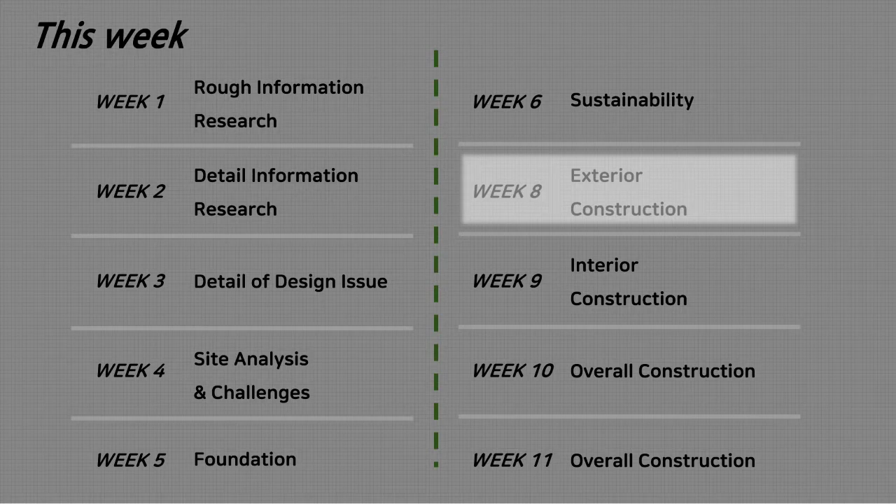Let's begin. This week we present you the exterior construction of the Aquatic Center. These are the contents, starting with the review. The exterior structure and calculation will follow next. Let's start it with the review.

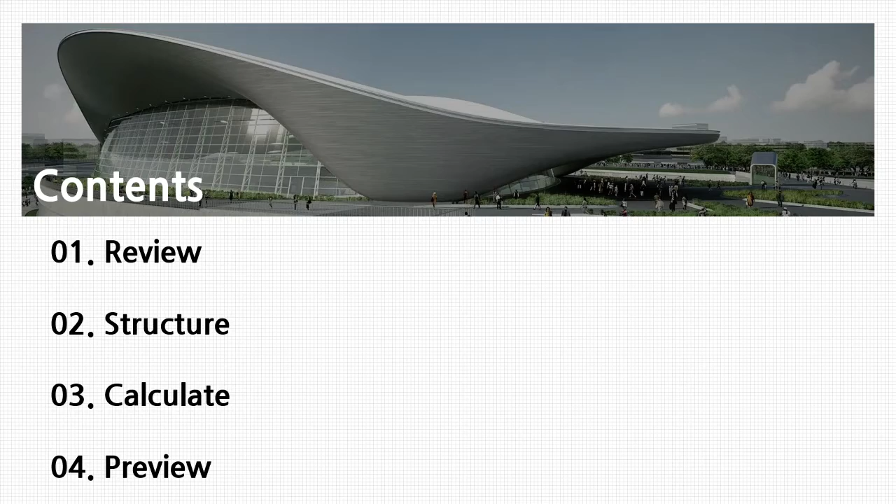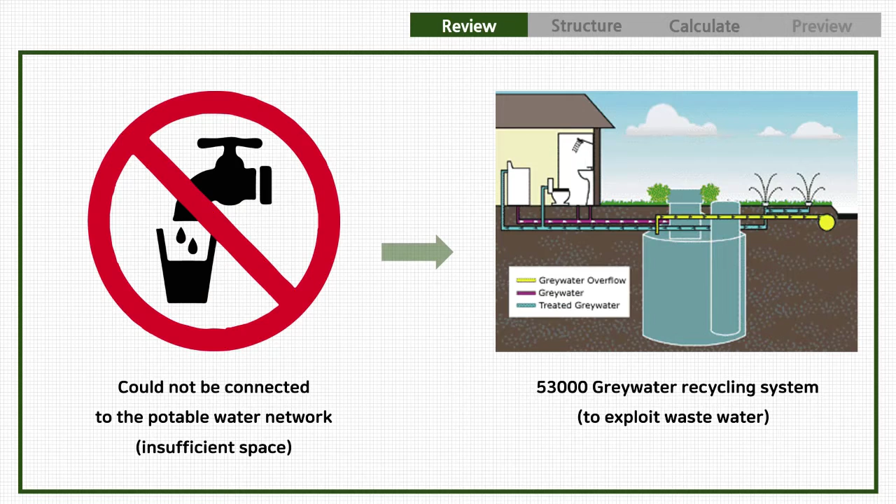The Aquatic Center could not be connected to the site-wide non-potable water network due to insufficient space in the service corridor connecting the venue to the main site. Alternatively, it employs a 53,000 greywater recycling system to exploit the vast quantities of wastewater. Approximately one-third of this processed water, 67.5 megaliters, is treated to a non-potable standard to meet toilet and urinal flushing demand, substituting mains water use.

The Aquatics Center also employs an innovative solution to reduce energy consumption during games time operation. Detailed thermal modeling and elemental redesign of the 15,000 seat temporary structures enable mechanical cooling to be entirely eliminated. The resulting carbon saving during games time operation is approximately 56 tons and the resultant cost saving over 250,000 pounds.

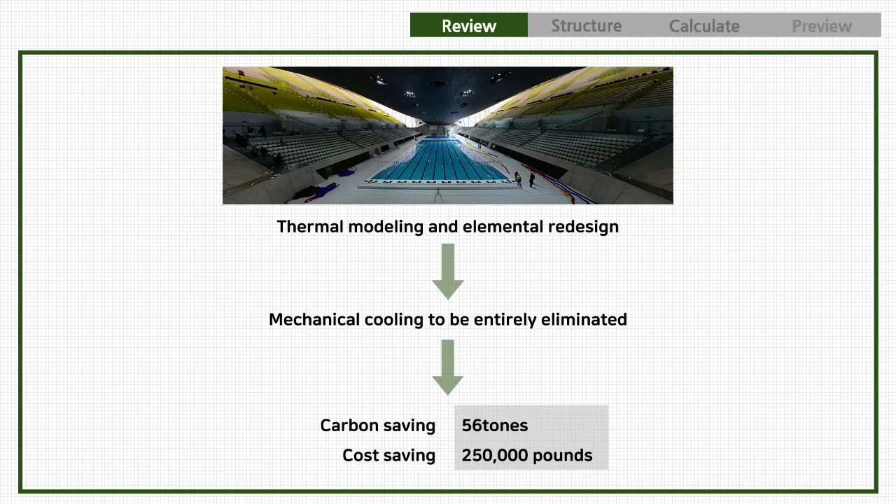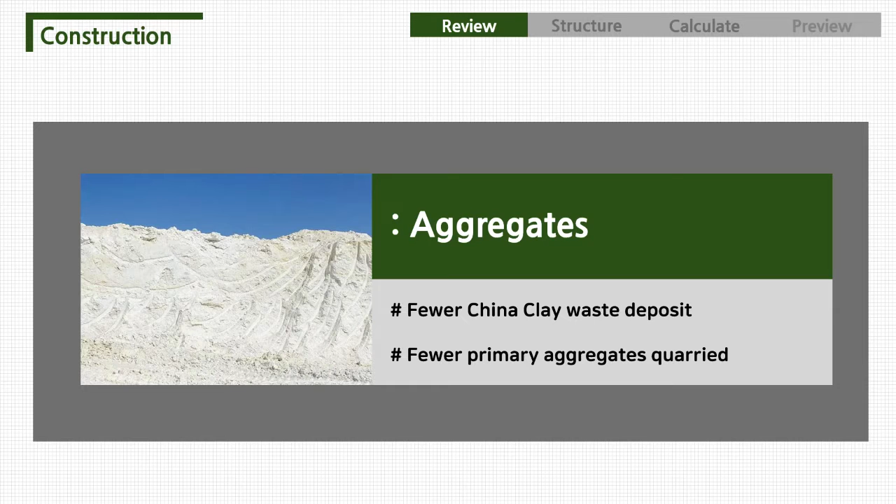This stent solution meant that fewer tons of china clay waste were deposited, and fewer tons of primary aggregates were quarried. Starting with stent solution, construction team tried to use secondary materials for the construction. Next, we present about GGBS cement. It is strong, high durability, and good appearance. This furnace slag is highly cementitious and high in calcium silicate hydrate, which is a strength-enhancing compound, increasing the strength, durability, and appearance of the concrete.

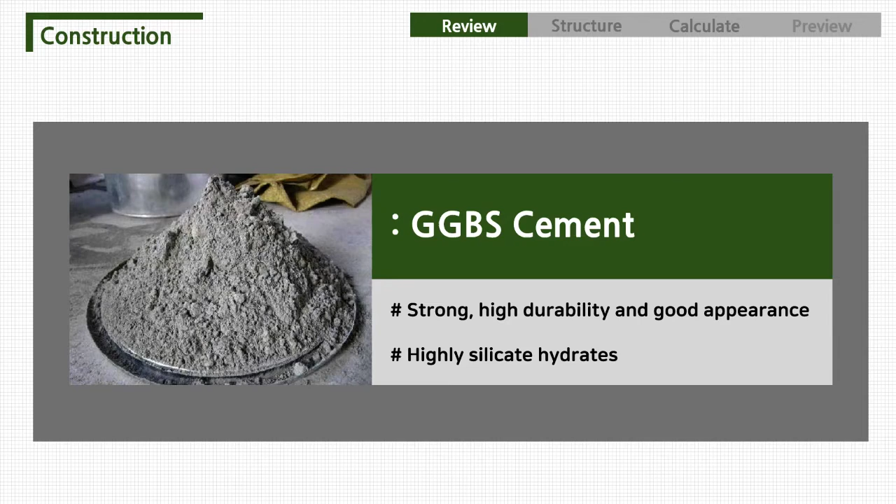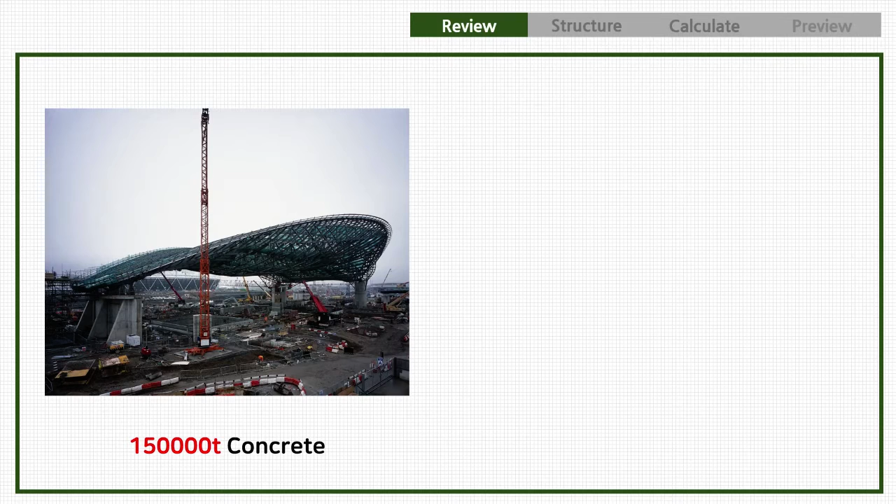Over 150,000 tons of concrete was used in the Aquatic Center. The sustainability of the center can be demonstrated by over 4,000 tons of embodied CO2 savings and substitution of over 29,000 tons of primary aggregate.

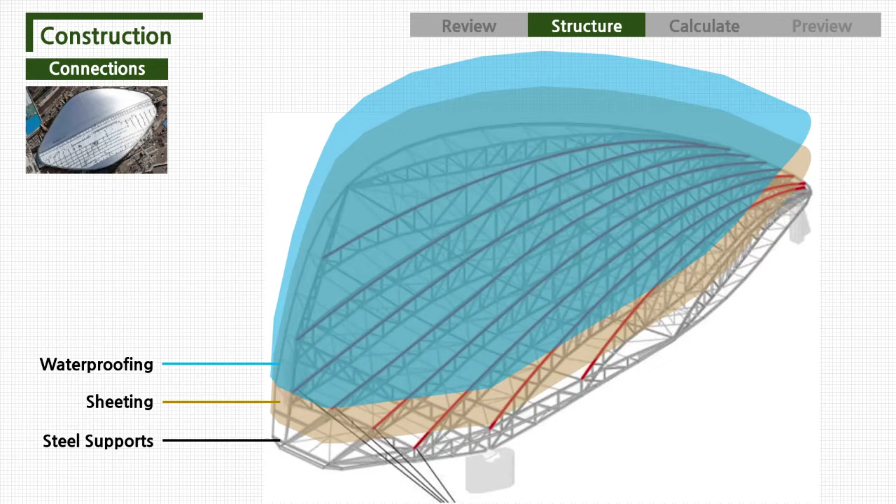Let's talk about roof structure. There are several layers created in the top of the roof. Sheeting and waterproofing were put down over the steel supports. Mechanical systems were placed into the space. Spaces were added before the final aluminum sheeting was added. The process of rolling out the sheeting for the roof only took a team of 25. It took only a month to cover the roof fully with the last aluminum finish.

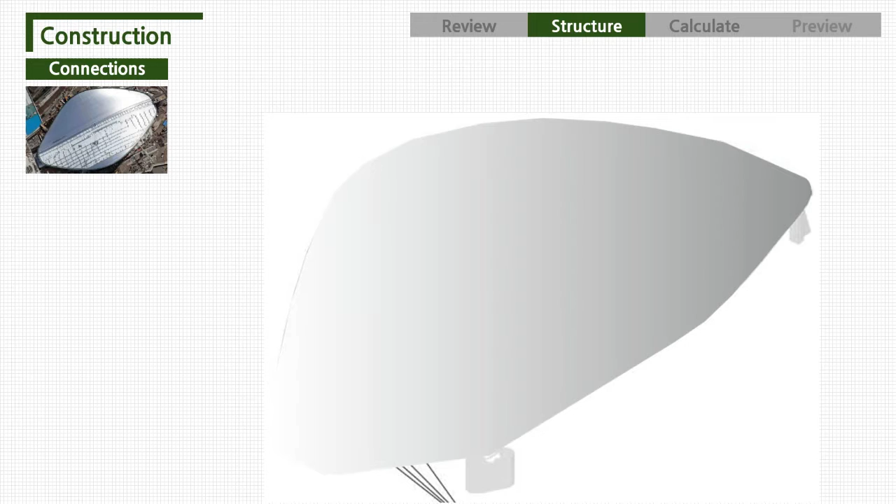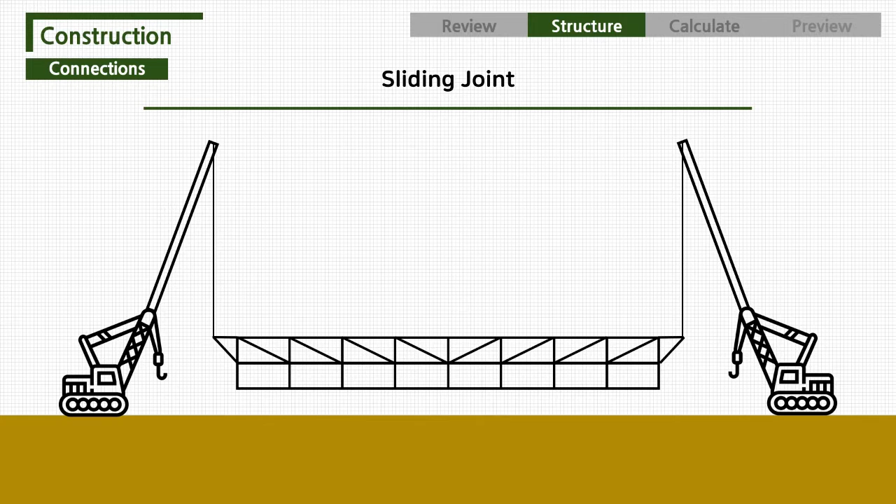The connection between the roof and the support columns was the sliding joint. Joints like these are commonly found in bridges. The joint can slide up to 2 feet. This is to allow for expansion and contraction that occurs in the steel roof structure due to temperature changes.

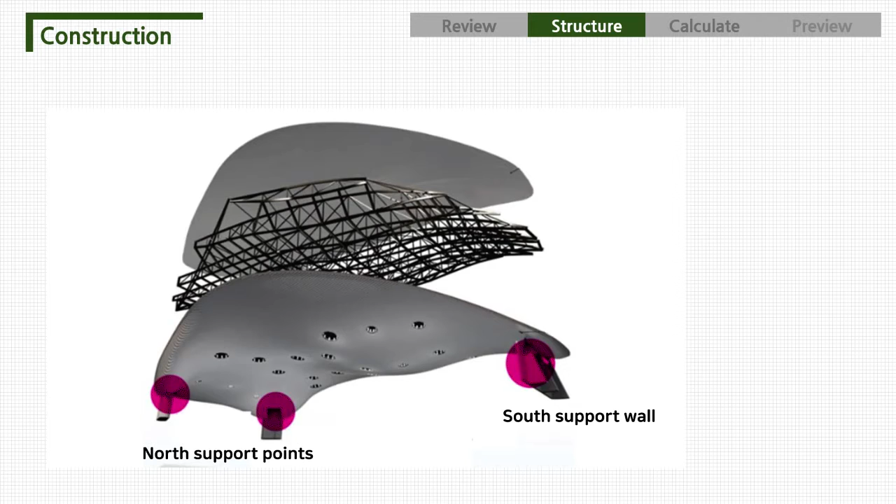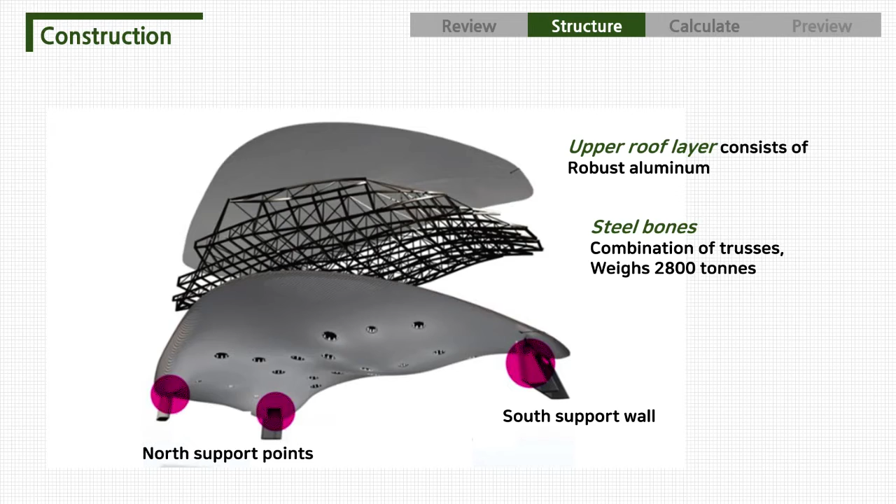As you can see in this picture, the roof structure is made of 3 parts and supports. First, the upper roof layer consists of robust aluminum, half of which is recycled. Next, the steel bones are a combination of shaped trusses to get a double curve, allowing a column-free clear view of the pools. It weighs 2,800 tons, and the hardwood ceiling is made up of 37,000 individual strips.

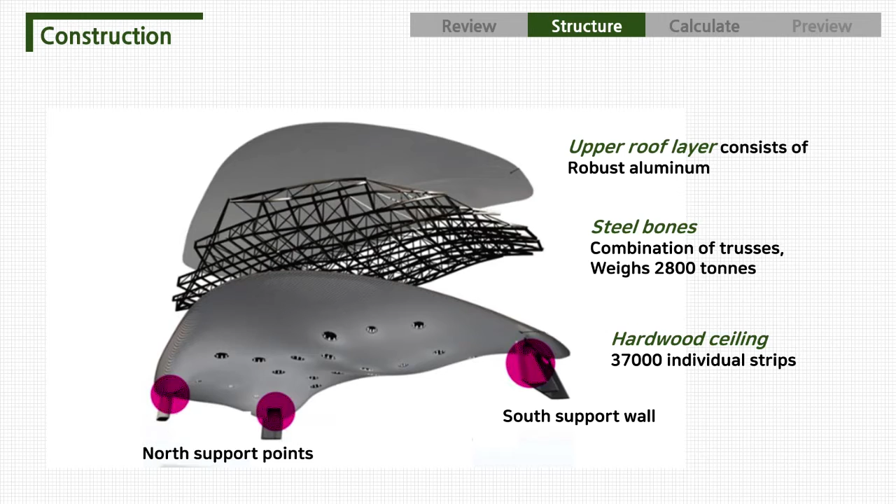The complete structure of 11,000 square meters is supported only in 3 points: a concrete wall at the south end and 2 concrete cores at the north side. Some of the steel trusses of the roof are 40 meters long and weigh 20 tons. Spanning from north to south, they cover the generously sized main area without any in-between supports.

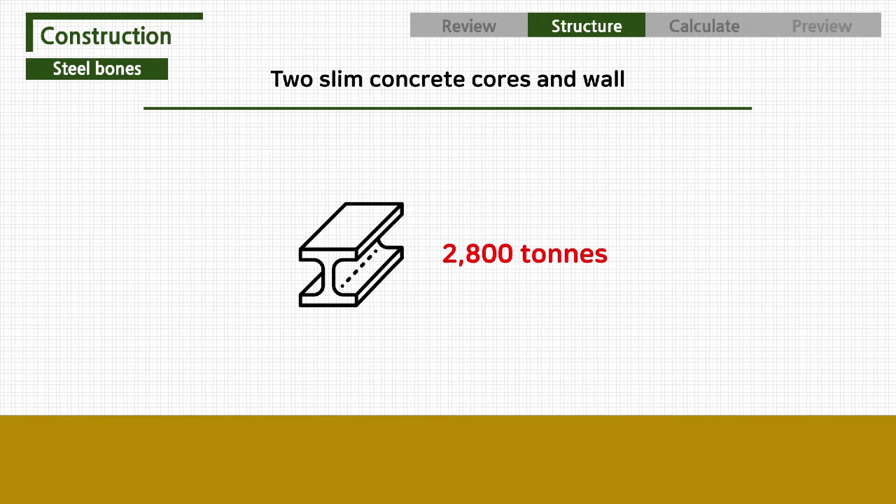Just 2 slim concrete supports and a concrete wall located opposite these at the southern end suffice to conduct the force of the hidden steel space framework construction into the ground. As much as 2,800 tons of steel were needed to give the 160-meter long and 80-meter wide roof its light and floating look.

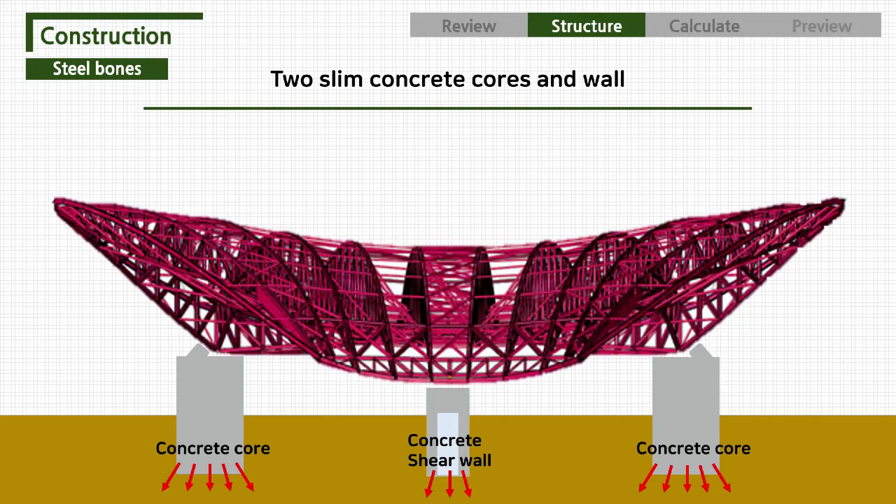This steel framework was initially constructed on temporary supports before the entire 3,000-ton structure was lifted up in a single movement and successfully placed back down onto its permanent concrete supports. The venue's roof proved to be one of the most complex engineering challenges of the Olympic Park's big structures.

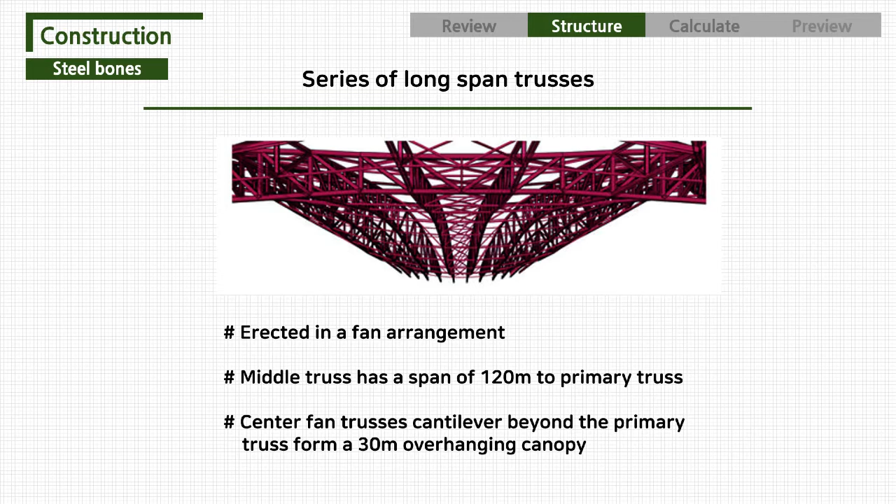A series of long-span trusses form the roof; they were erected in a fan arrangement to create the plan geometry of the structure. The middle truss has a span of approximately 120 meters to a primary truss, which in turn spans 54 meters in a transverse direction between two concrete cores. These center fan trusses cantilever beyond the primary truss to form a 30-meter overhanging canopy at the northern end. And this is the video that explains the roof construction process.

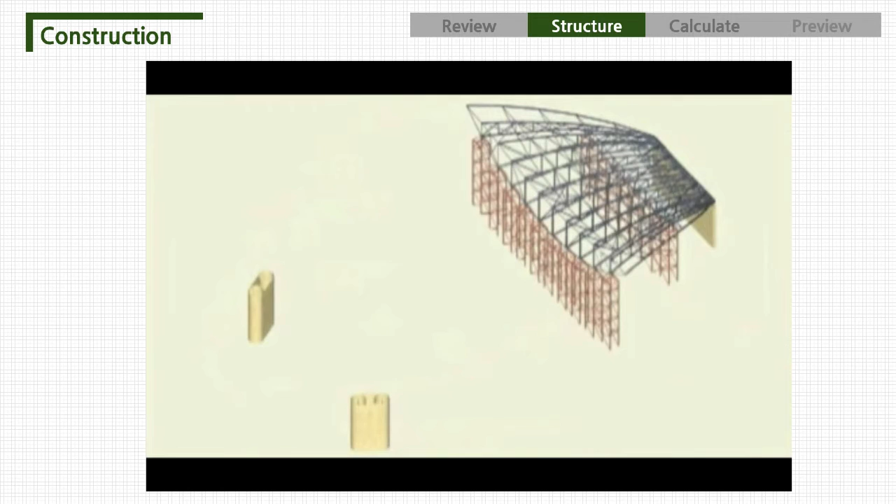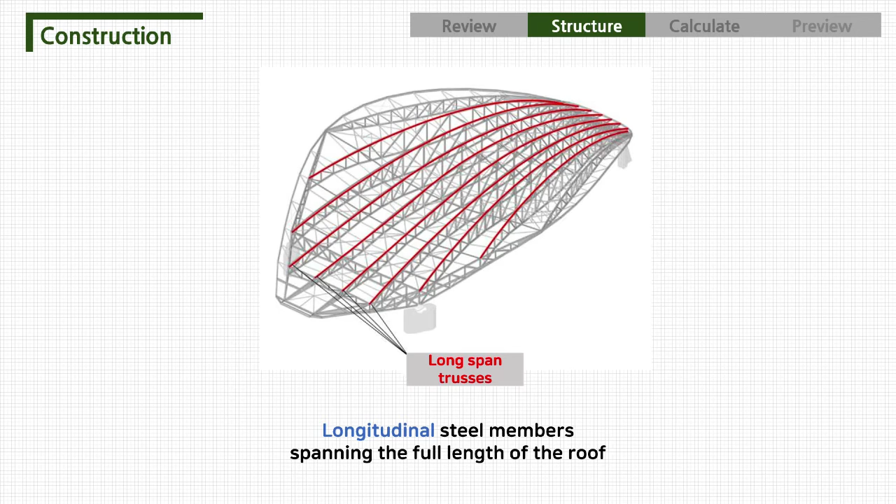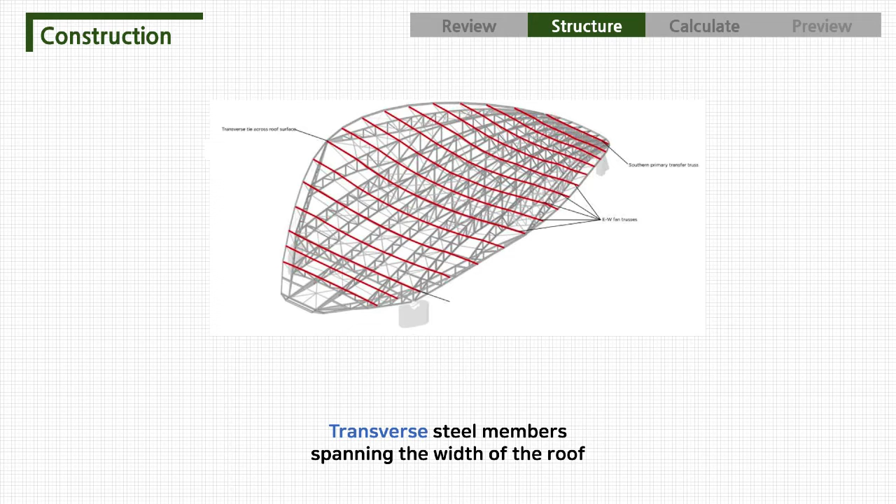From now on, let's analyze how the roof part is solid without collapsing. The roof structure comprises a series of long span trusses spanning the length of the main pool hall, from the transverse truss mounted on southern retaining wall bearings to another transverse truss spanning between the northern concrete cores. The main trusses lie in a fan arrangement to create the plan shape of the roof.

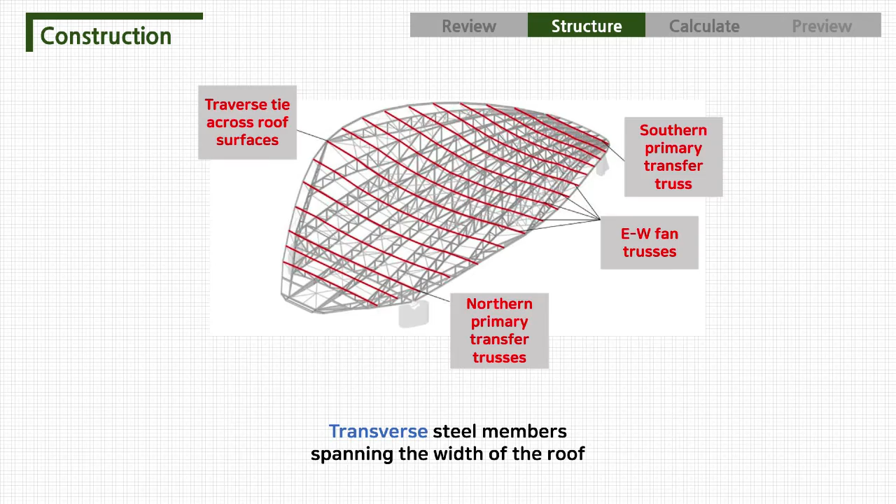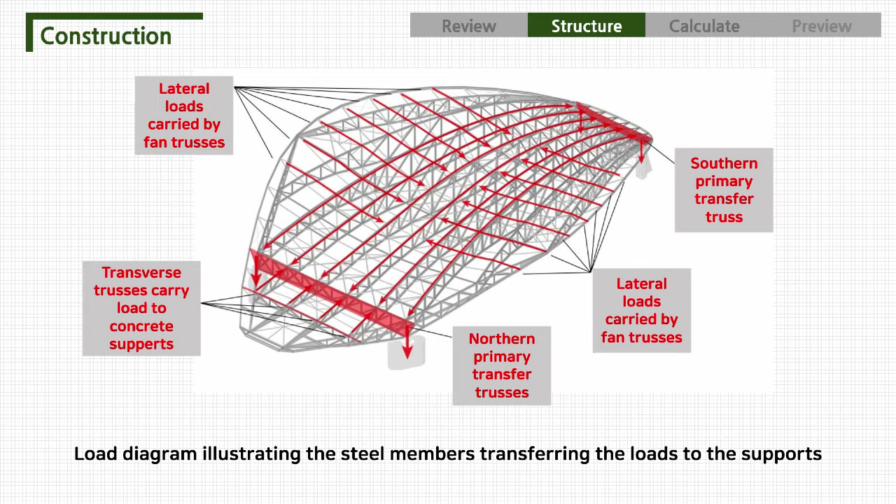The center fan trusses cantilever northwards beyond the north transverse truss 100 feet to form an overhanging canopy over the main public entrance plaza. The center fan trusses carry load in truss sections spanning between the north and south transverse trusses, which carry the load down to the supporting bearings on the concrete structure below.

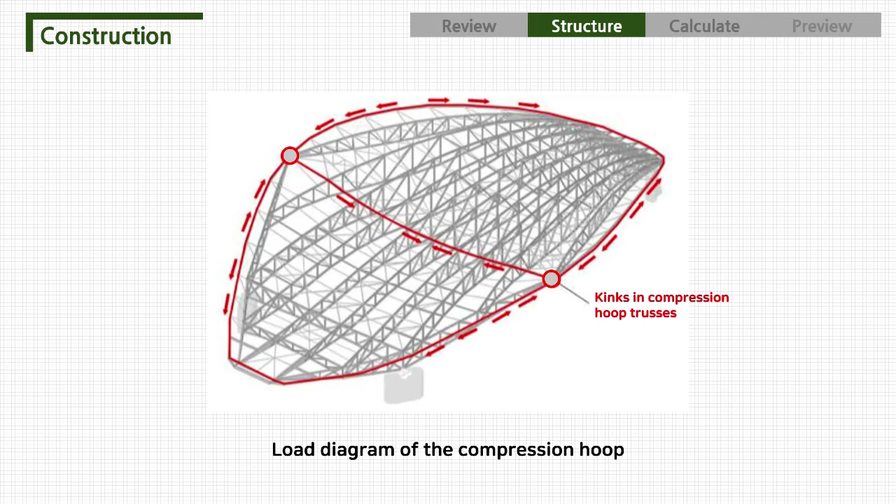Under uniform loading, the two opposite inclined arches in the wing areas balance each other, forming a compression hoop around the roof perimeter. A tension force arises from the change in geometry of the compression hoop in plan at the kinks, which occur at the wingtips, and this is resisted by a tension tie across the center, resulting in tension force in the central fan trusses.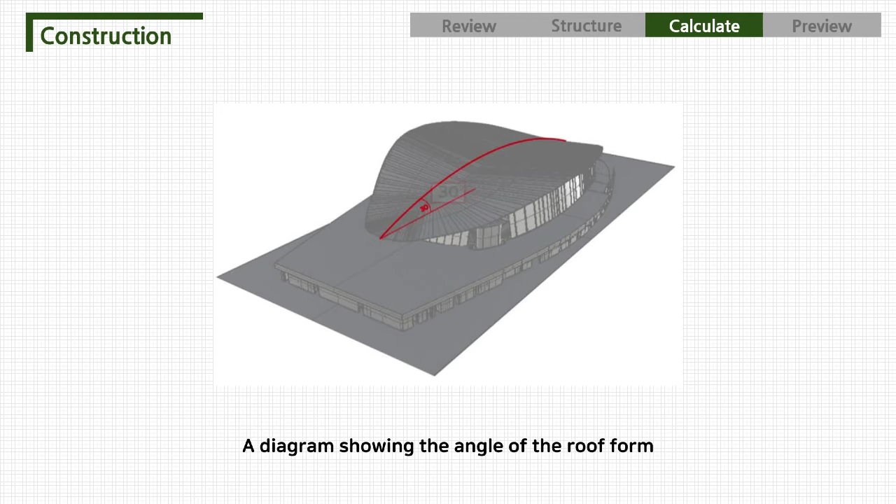The structure of the roof can be deduced to a dome form. In a dome structure, the angle of 34 degrees to the normal separates compression and tensile forces. In the London Aquatic Centre, the angle of the roof is 30 degrees. Therefore, it creates a compression hoop instead of a tension ring, since a tension ring would occur if the angle was greater than 34 degrees.

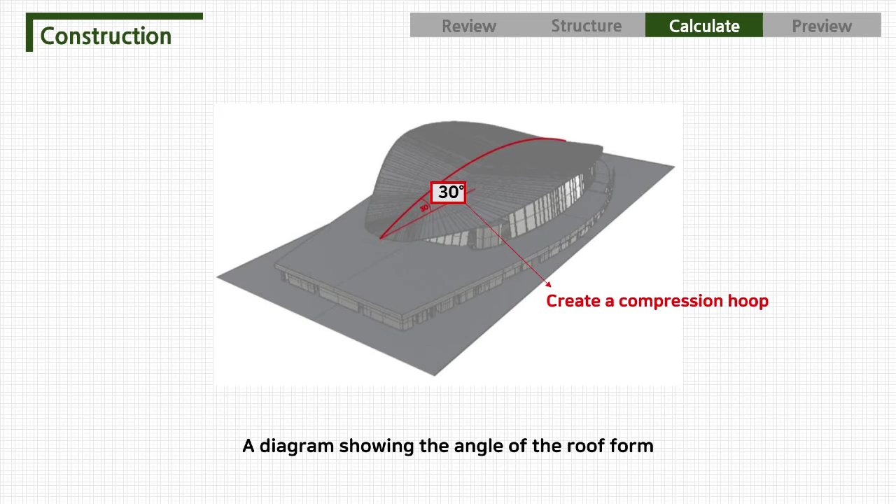The attraction of this building is the roof, and it has an unusual shape on the outside.

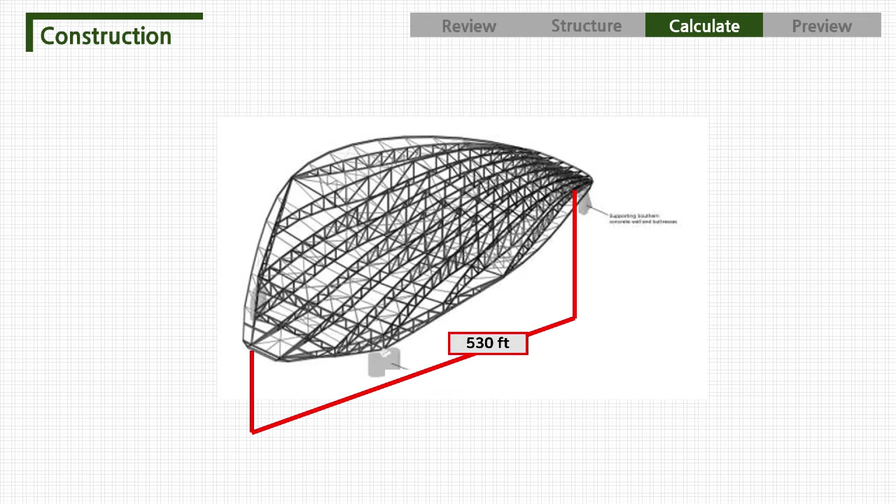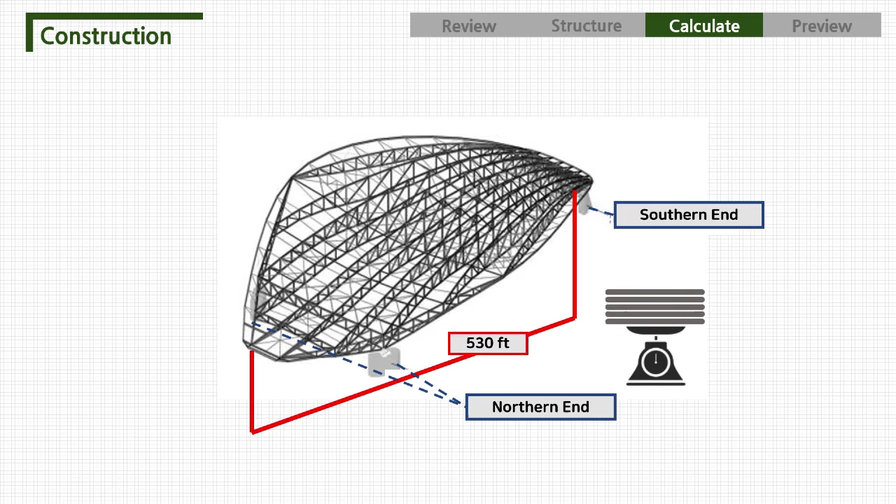The 118,400 square foot structure spans a column-free area 530 feet long and up to 300 feet wide, and it is supported on bearings on two concrete cores. The roof contains about 3,200 tons of structural steel, of which 2,000 tons are fabricated plate girders, with structural connections totaling around 600 tons.

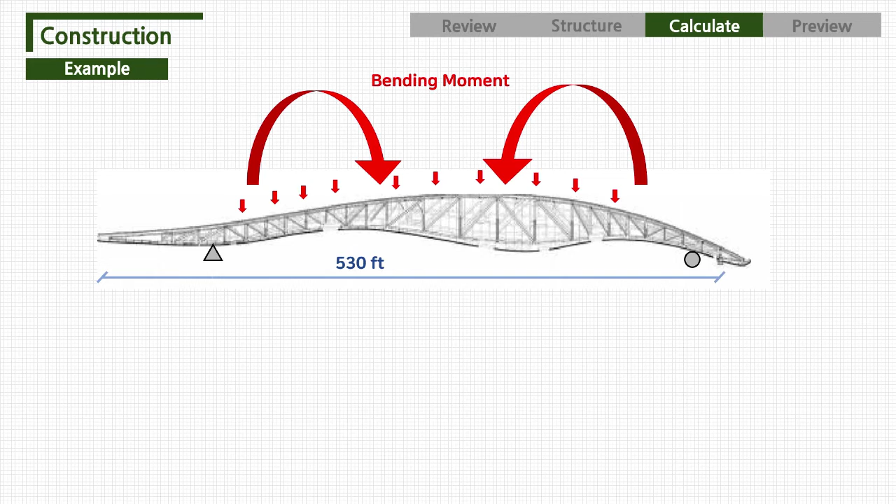It comprises a series of long span members, so it will be vulnerable to bending moment from the roof's weight. We should calculate and analyze whether it could adversely affect the building.

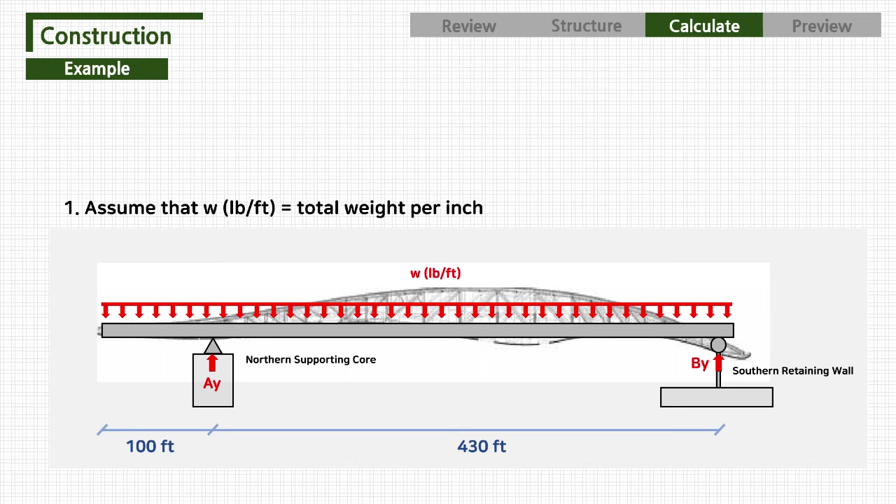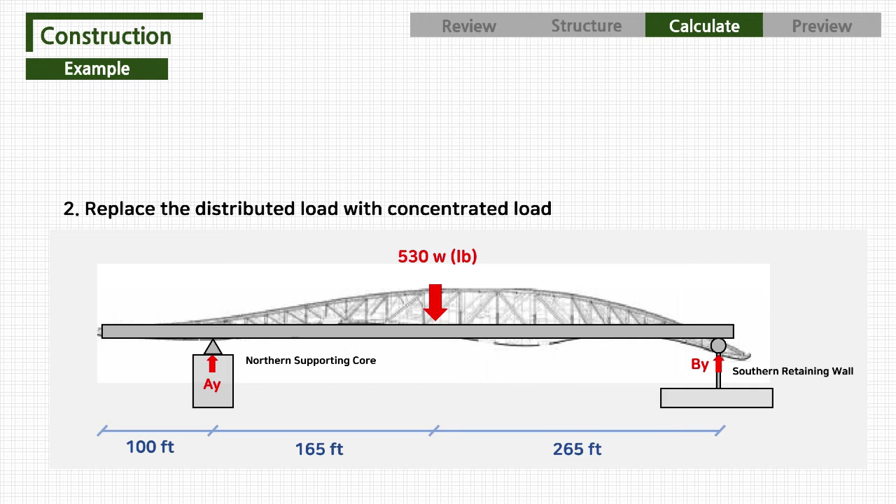Assuming the total weight is W pounds per foot, we can get the reaction force AY at the northern support core and BY at the southern retaining wall. After replacing the distributed load with a concentrated load, we can set up equations to obtain the values of the reaction forces AY and BY.

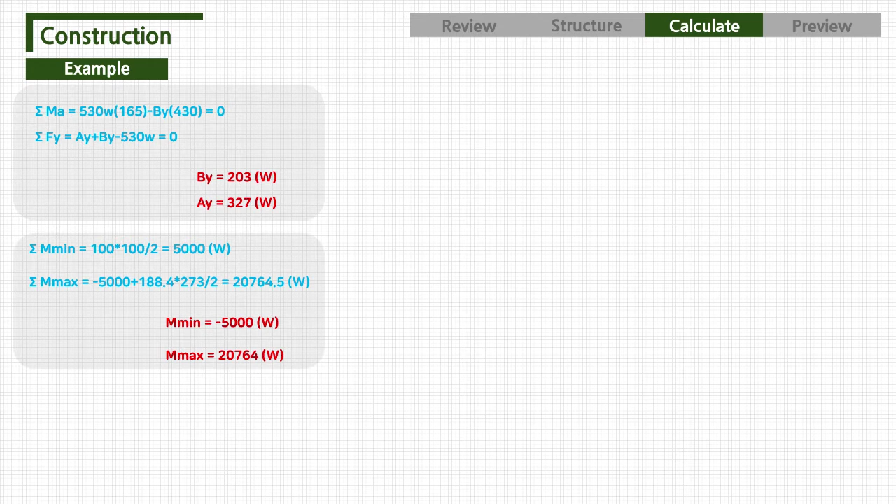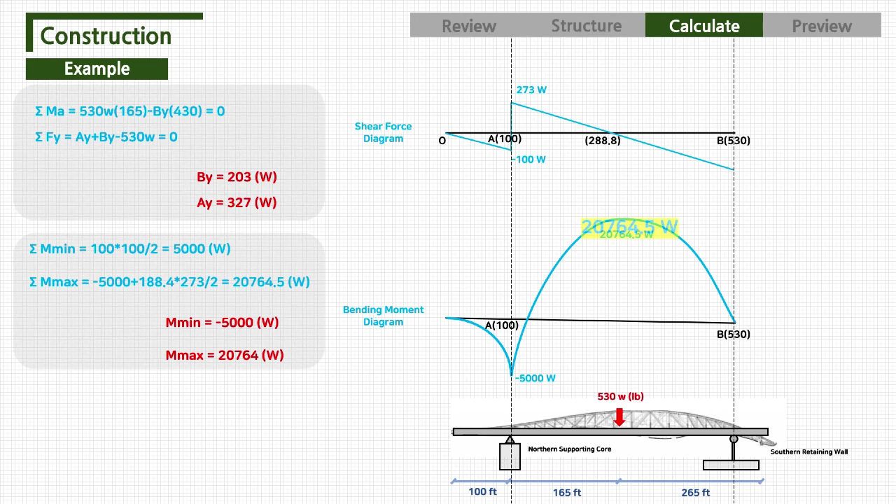Reaction force values and bending moment values were obtained through several equations, and we can get shear force diagrams and bending moment diagrams. As we can see in this graph, the bending moment has a high value compared to the reaction forces.

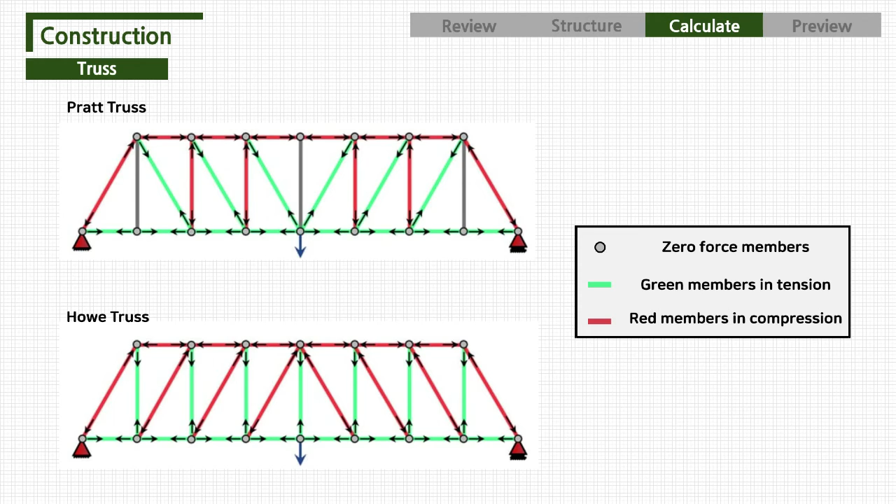For that reason, they use this series of trusses because its simplicity belies its exceptional ability to span very large distances with great efficiency. It's this efficiency that makes them well suited as this building's roof.

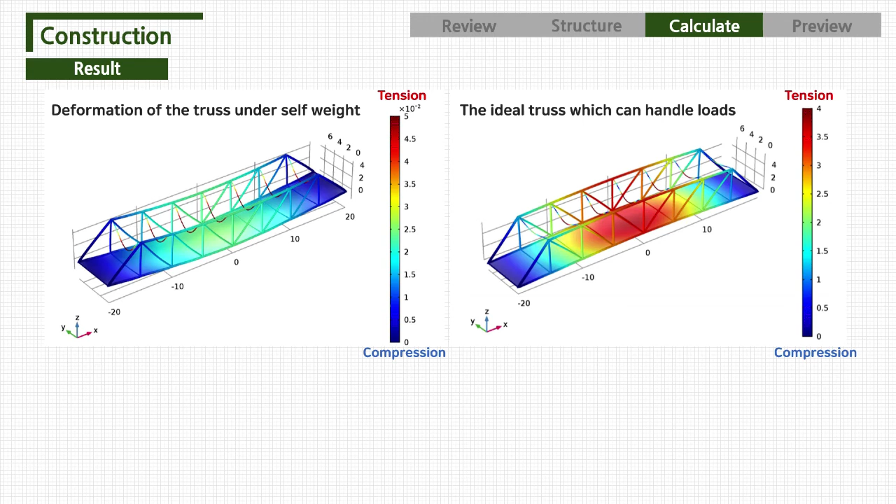This roof is exposed to a pure gravity load as well as the covered roof, so we should evaluate the stress and deflection fields to see if it can sustain those weights. Changing any of the Pratt truss bridge's dimensions or materials affects its ability to handle loads. That's one of the reasons why it has the inclined arch shape, to handle the middle part's tensile forces.

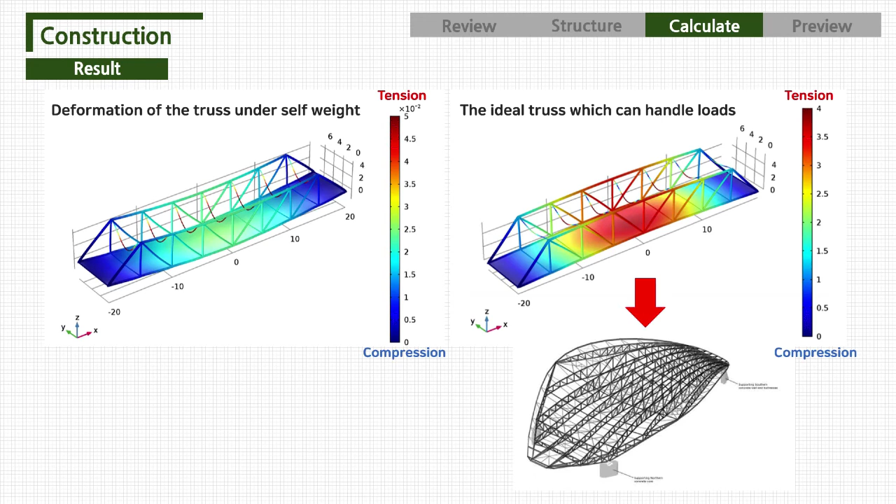The construction of the pools began after the last of the roof beams were lifted. The pools were cast in place to make them as watertight as possible. For a watertight pool, there are three conditions.

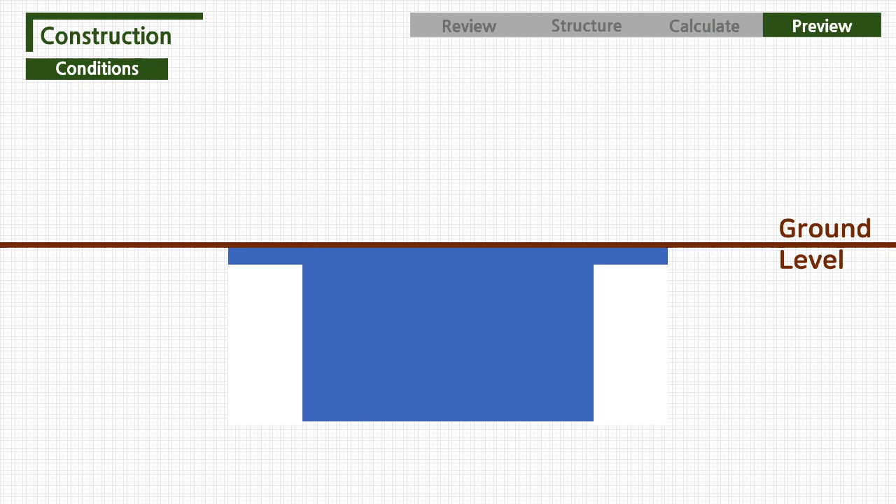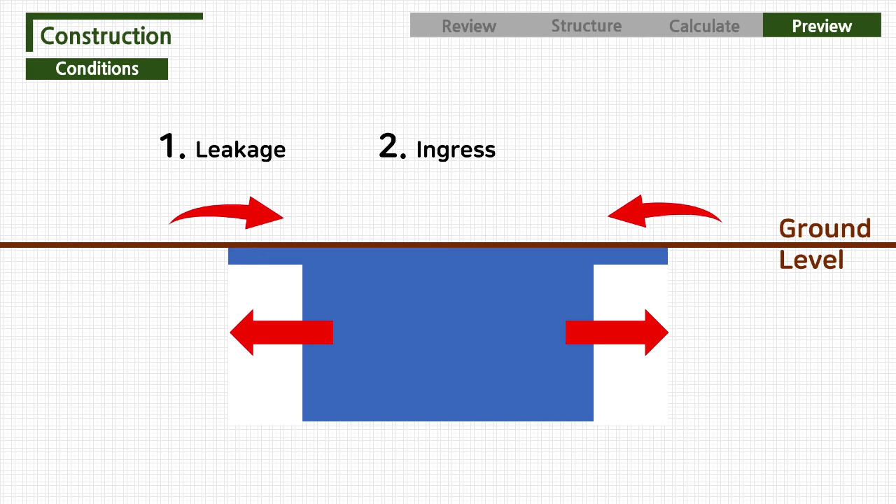First, the pool tanks must prevent water leakage due to cracks from the tank walls. Second, the pool tanks must prevent water ingress from the high groundwater level and potential river flood. Third, the pool must maintain quiet water, because in the Olympic Games records are very important.

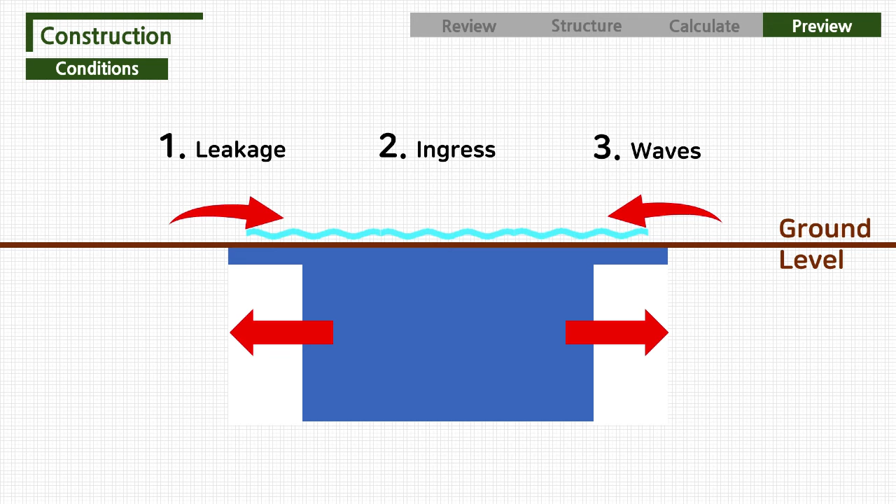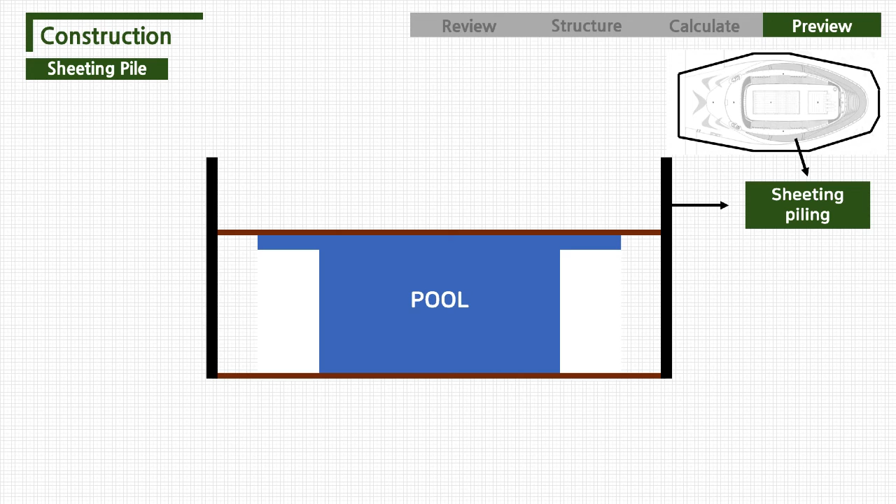First, to create watertight ground conditions, they installed a temporary sheet pile wall containing the building site, considering the river located next to it. By doing this, the aquatic center's temporary cut-off wall effectively formed three sides of a box, linking to a final side formed by the river wall.

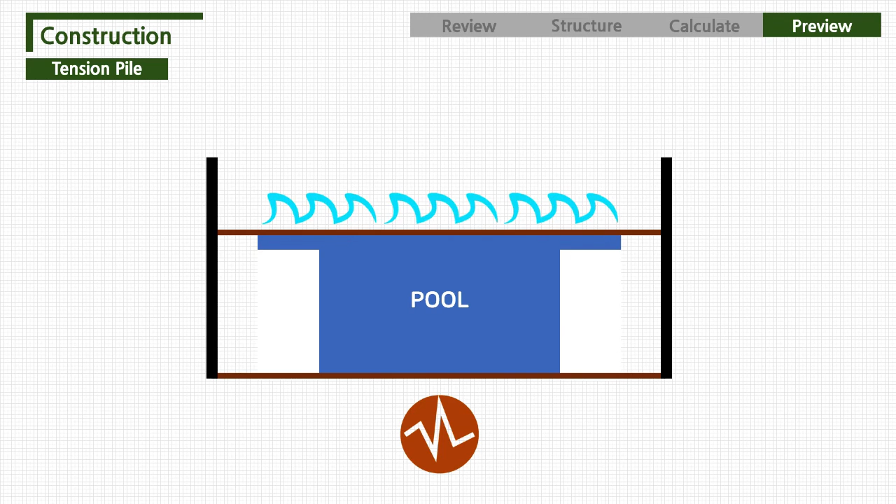Then they needed to control the water streams in the pool, because fluctuating water waves cause a significant effect on athletes' records. For example, when soil shake occurs, the pool tanks fluctuate and divert the water waves, disturbing the quiet water. So to prevent these fluctuating water waves and ensure stiffness of the pool tanks, they installed tension piles.

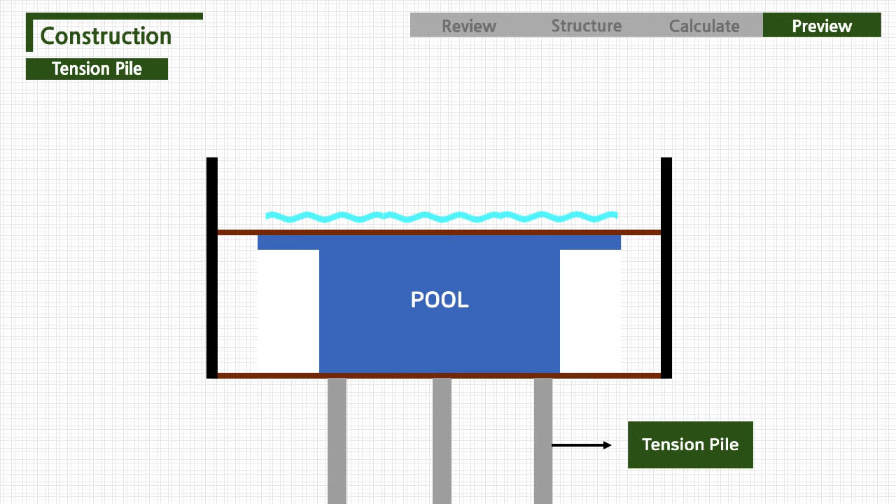The tension piles hold the pool tanks against swaying soil, and these tension piles increase the pool tanks' stiffness. Not only that, all pool tanks had to fully integrate the water supply pipework, lights, footrest, floating floors, and deck level transfer channel required to provide an Olympic standard.

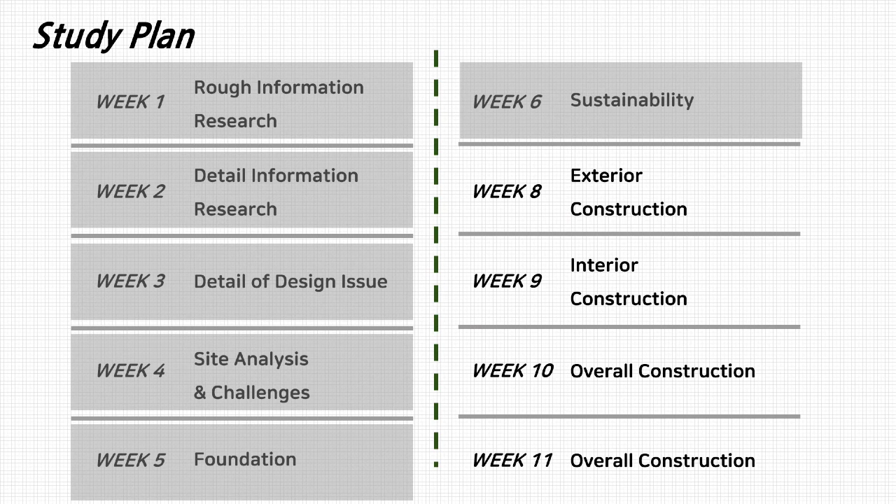These are the study plans. So far we have presented for 6 weeks, and today we just told you about the exterior construction.